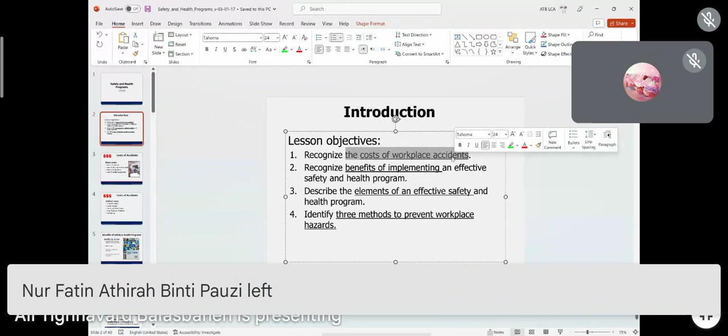First of all, what we want to study today is to recognize the costs of accidents—if an accident happens, it's against our will, but what kind of results does it have for us? We want to know the benefits of implementing safety rules, the elements of an effective safety and health program, and describe in more detail the methods to prevent accidents or hazards in the construction site.

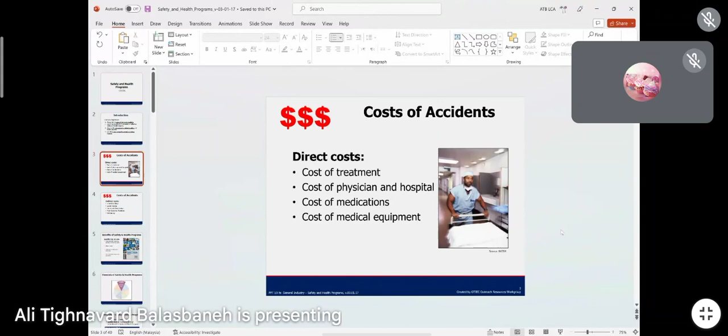First of all, we said we want to know what kind of cost the accident had for us. Let me expand this page. Okay, it's better. We got some costs, distributed into direct and indirect.

The direct cost, at least as you can see, is the cost of treatment of the worker who got the accident already: the cost of paying for the hospital, the cost of medicine. The medicine and hospital are two different costs, because the hospital cost is what the employer may pay only for the hospital, but after the hospital the worker still needs some medicine, some remedy with different costs—maybe physiotherapy, something like that. Cost of medical equipment in order of breaking a hand or leg or something like that. So these are all different direct costs that are put on the shoulder of you and your project.

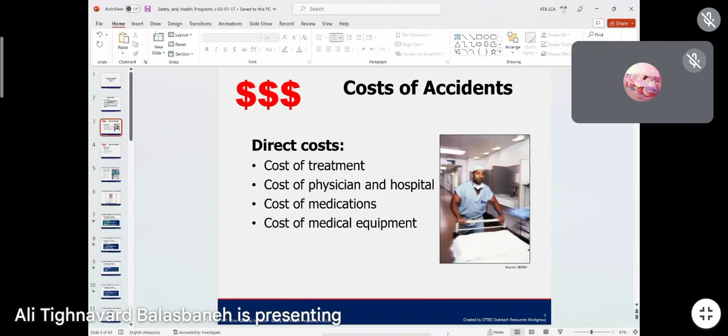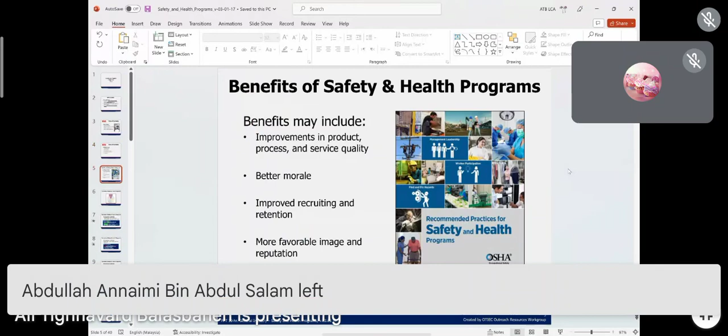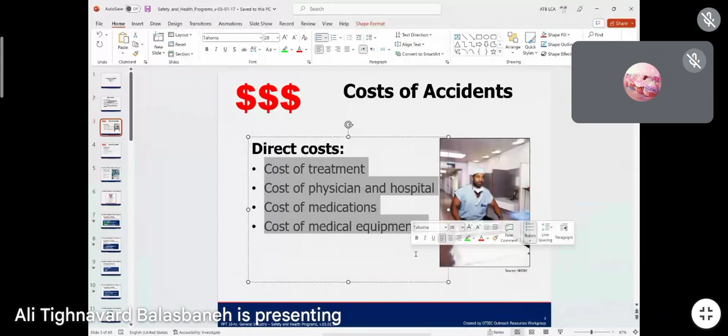And the benefits of a safety and health program—there are some benefits of course. Finding this benefit is very easy: as long as you don't face any of these problems, you already have the benefit. But let's review it. Some of the benefits: follow the OSH rules, improvement in the process and final product, better morale, improved recruiting and retention, and a more favorable reputation of yourself and your company in the construction area.

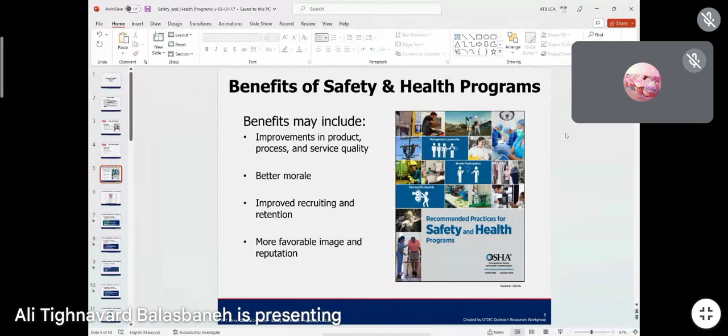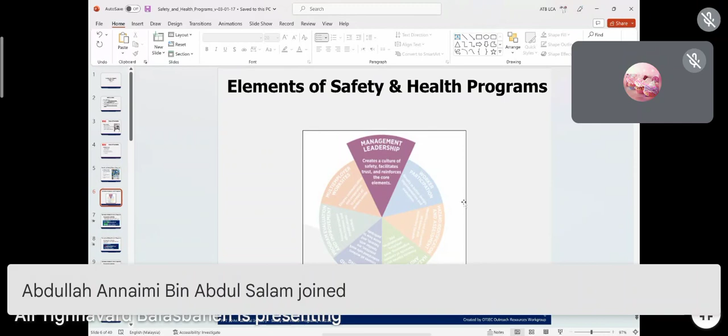So now we just reviewed what kind of consequences your project, your company might face, such as direct costs and indirect costs—it puts some costs on your company. So now, if we follow the OSH rule, what kind of element do we have to fulfill? What kind of principle do we need to follow? You might tell yourself, okay, I don't want any accident, but what should I do? What exactly, exclusively, do I have to follow to avoid any accident in my project?

Well, it's very easy, and at the same time not easy. It's easy because we know what we have to do—we're going to learn it. It's not easy because you have to do it in reality. Let's review: the first element or principle is management leadership. Who must be the leader? How can you be a leader? This is the hard part that you need to achieve through study and through experience. But let's see what is the detail. The first element of this safety and health program we just mentioned is management leadership.

But what action do you have to make as a leader? You need to communicate the safety and health program. Okay, how should I do that? Let's see—you need to establish a written safety and health policy statement and give it to the top management to sign it. Then everybody must follow it because it becomes a written rule by your company.

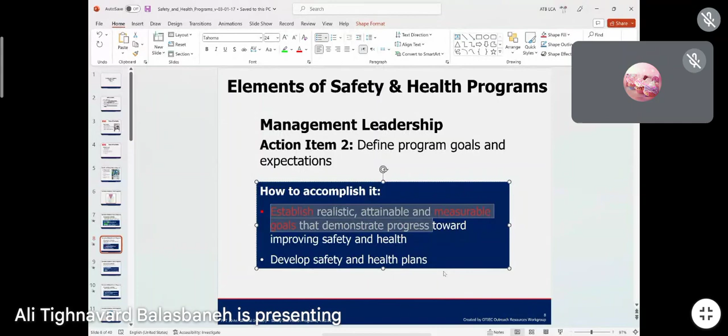The third action to become a leader: allocate the resources. Integrate safety health into planning and budgeting. This is very important because planning is something you already read about in the sustainability construction management subject. Budgeting is something else, and scheduling is also something else - we're not talking about scheduling here. We just want to integrate, merge the safety rule into planning and budgeting.

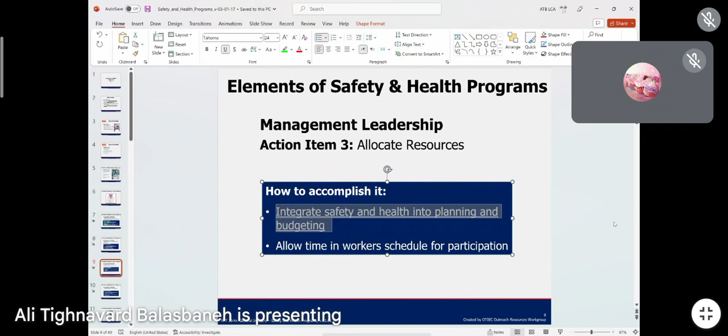For example, I want to give you a very small example to make it more understandable. How do we integrate safety rules with budgeting? When you calculate the project budget, you need to consider everything necessary for safety that workers need to use - for example, helmets, clothes for the workers, scaffolding, and the nets we install around the project to avoid something falling down. So that also needs to be considered.

The fourth action is expect performance: define the responsibility for accountability, and set an example for workers by following the same procedures.

So if you follow these 4 steps, it makes it a responsibility for your leadership stage - this is what you had to do to avoid an accident. There are 7 different stages. This is just the first stage.

Second stage is worker participation. Maybe it's strange for some of you - how do I have to invite workers to participate in safety? Maybe they are not well knowledgeable, maybe they're not educated - how can I expect them to share some of my responsibility with them? Is it even possible? Yes, not only possible, but it's one of the strategies to avoid accidents on site.

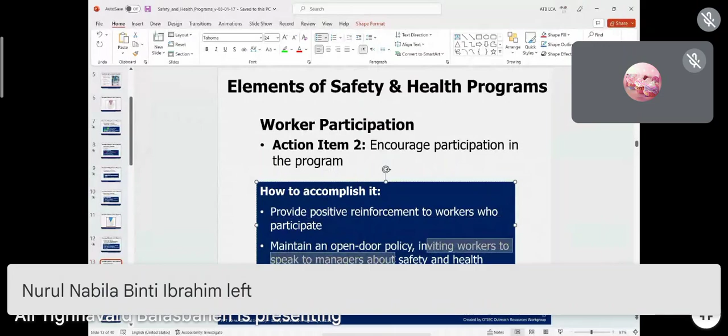Inviting workers to speak to the manager about safety. In some cases they have more experience - of course not in your job, but their own job - that we might miss or skip. We can use their experience. I'll go back to worker participation.

Action 3 for worker participation: involve workers in all aspects of the program. For example, what kind of program do we need to involve them in? Developing a program, reporting hazards, and developing solutions. This actually goes back to number 2, encourage them, but here we're expanding - developing solutions as well, analyzing the hazard, defining safe work, and some other items you can read. Let me know if you have a question.

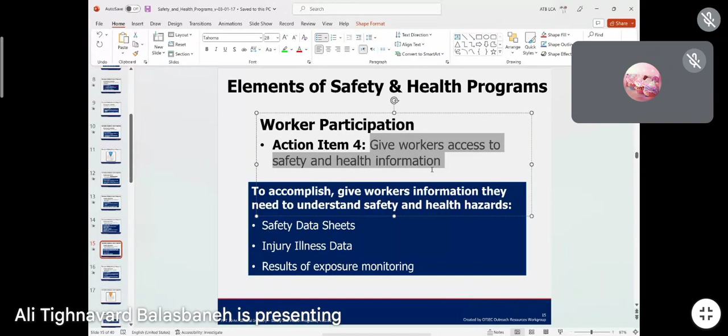And remove barriers to participation. This means when you invite them to access the safety information, you invite them to be involved in the program. At the same time, you must remove the communication barrier between you and the worker.

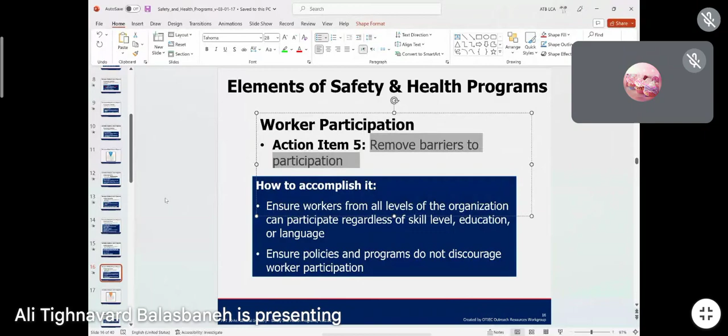Okay, now the third element of the safety program - we are reviewing how we can bring safety to the construction site, to our job. There are 7 elements. Now we are going to learn about the third one, which is hazard identification and assessment.

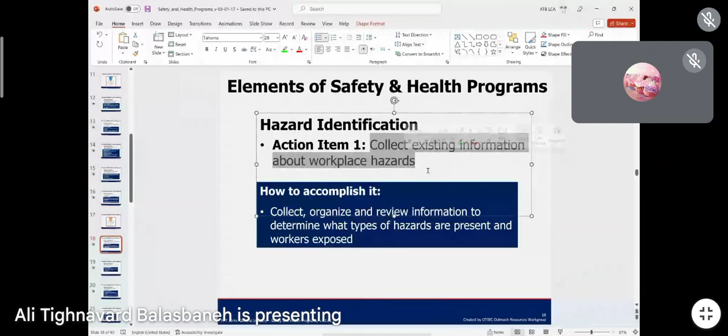There are actions that need to be taken here. For example, collect existing information about any danger, any near miss that's available on the site. Action 2, inspect the workplace, and this inspection must be regular - every day. Every day, not every month or every other week or every other day. Okay? Every day. Routine inspection of equipment, material, and talk to workers.

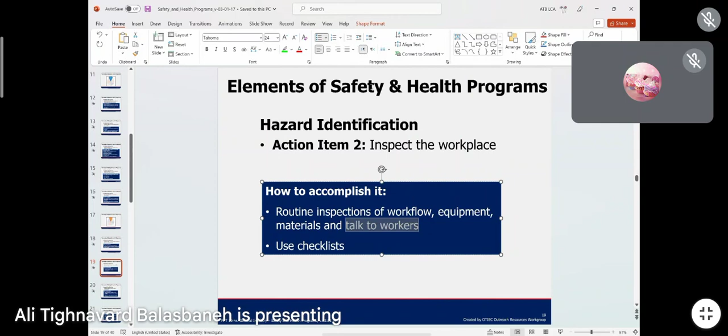Normally, when you start your job, if you choose to become a site manager or engineer on the site, you're going to have a place with some facility on the site. We studied about it last week - you remember the location, the site layout? Okay, you have an office there. When you have an office, it does not mean you sit there in your office from 8 in the morning until 6 p.m. This is not acceptable. You always need to go visit the work progress and talk to the workers - one of the things you need to talk to them about is the safety and health issue.

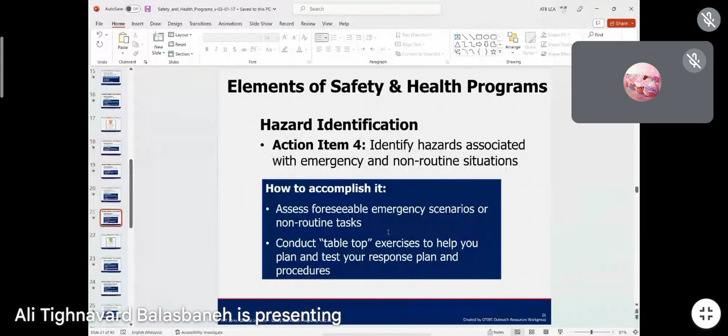Conduct incident investigation. Identify hazards associated with emergency and non-routine situations. So this we call conduct tabletop exercise that helps you plan and test your response plan and procedures. So this was the stage for element three. Now element four.

What do we have here? Hazard prevention and control. Here we want to know how we can prevent the hazard and control the situation. We want to actually prevent injury or accident happening to the workers.

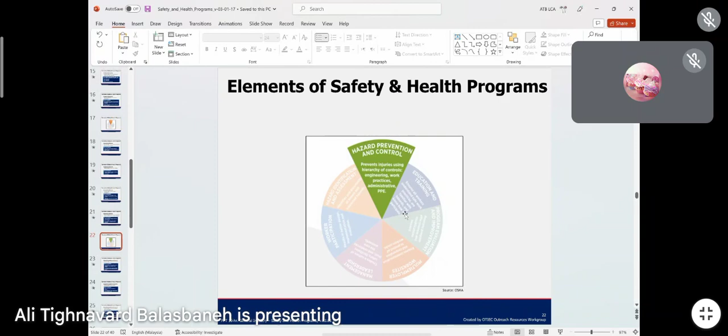Same as the previous one, we have some actions here. Let's see, what is the first action toward hazard prevention? Identify control options. Control options, what is that? What do we have to identify? Let's see how to accomplish it - review literature, OSHA standards. You remember NIOSH?

We studied about it on the second week. There were 3 different departments in Malaysia who are responsible and working on safety, and one of them works on publishing new research. Yes, that's it - new publication. And also the other 2 departments' work is hidden inside this, etc., for potential control measures.

And then another step to identify control options: get inputs from workers, safety consultants, or investigate other workplaces with similar hazards.

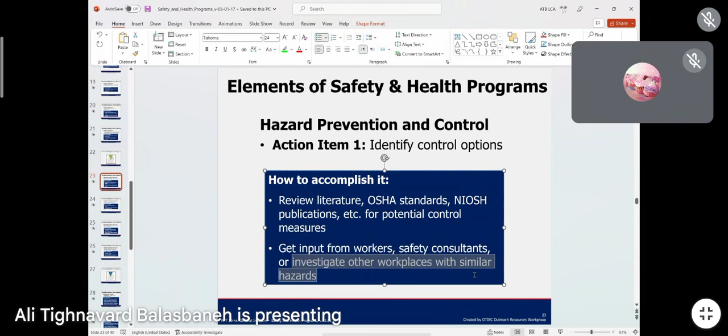I can still add or use, for example, the next item - use your experience from previous workplaces, especially if your previous work had some similarity with the current job, on how you can identify the control options and prevent the incident.

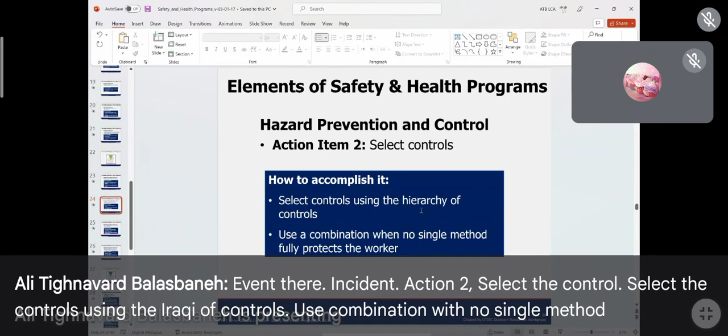Action 2, select the controls. Select the controls using the hierarchy of controls. Use a combination when no single method fully protects the workers.

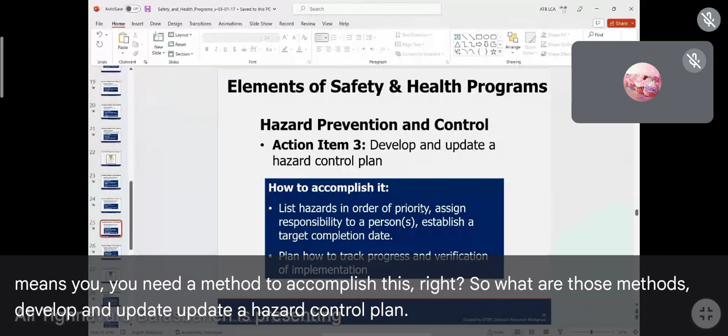Action 3, develop and update a hazard control plan, which means you need a method to accomplish this, right? So what are those methods? Develop and update a hazard control plan needs to be accomplished through listing hazards in order of priority.

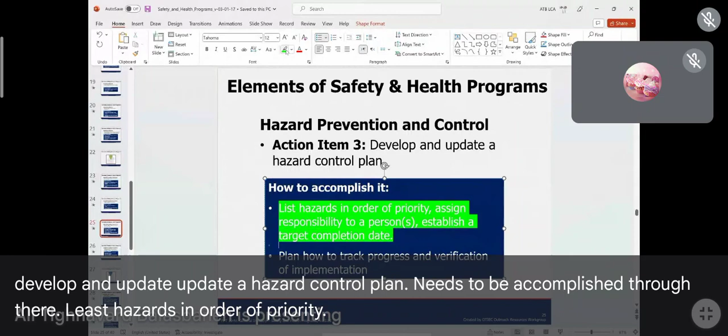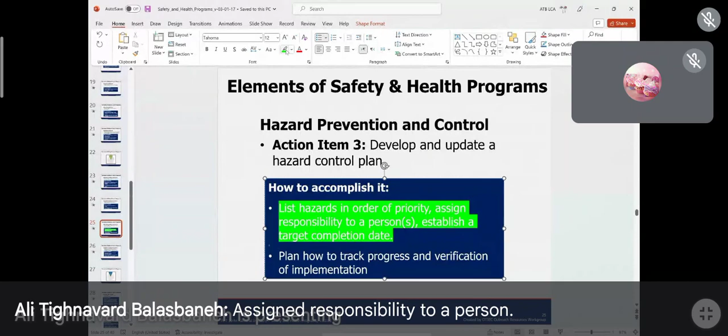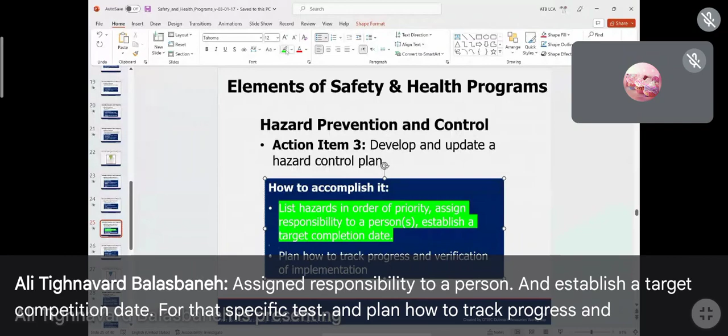Assign responsibility to a person, and establish a target completion date for that specific task, and plan how to track progress and verification of implementation on the site.

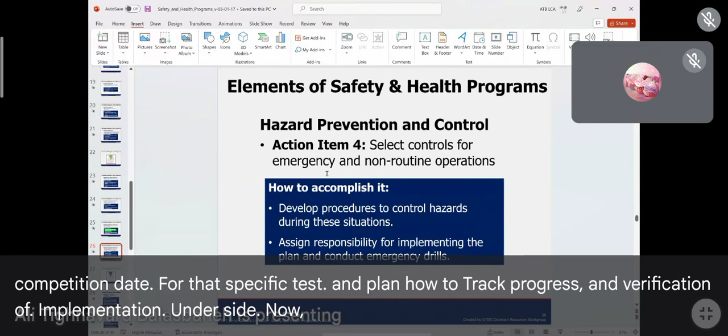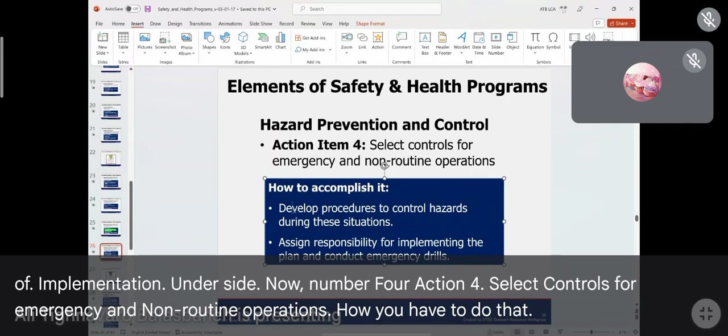Now number 4, action 4: select controls for emergency and non-routine operations. How do you have to do that? Develop procedures to control hazards during this situation. Assign responsibility for implementing the plan and conduct emergency drills.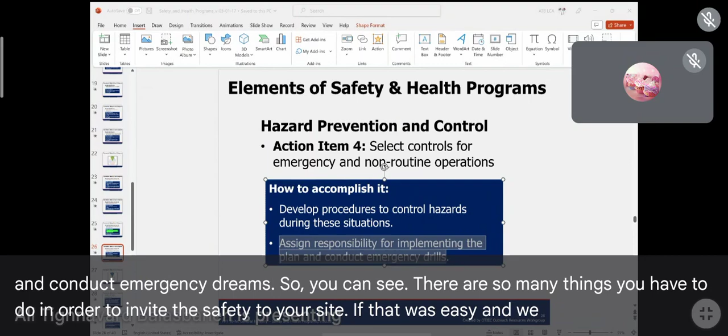So you can see there are so many things you have to do in order to invite safety to your site. If that was easy and we could do it in just one procedure, then I believe we would never see any accident on the construction site or any industry. But you can see this is complicated and requires heavy work.

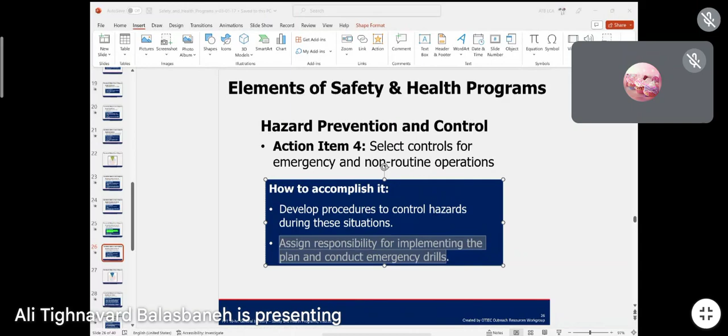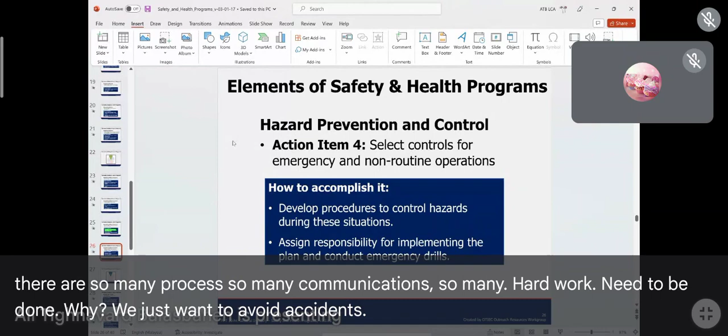I want to show you something. Give me a second. Okay, take a look here, let's see what we have. You see, there are so many processes, so much communication, so much hard work that needs to be done. Why? We just want to avoid accidents, to not face that direct and indirect cost.

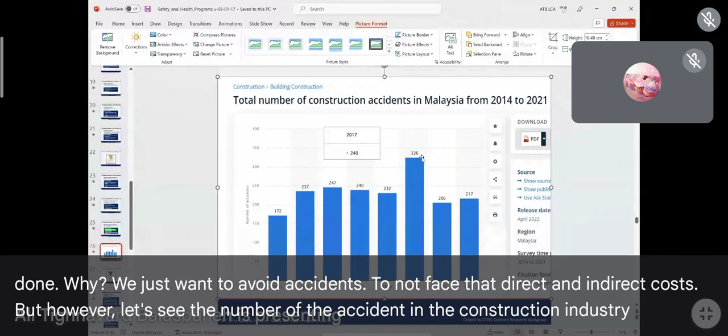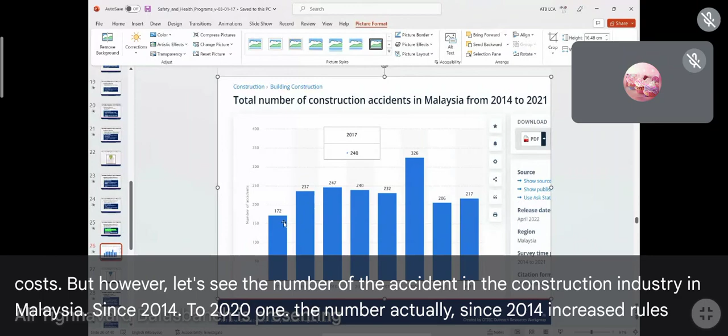Let's see the number of accidents in the construction industry in Malaysia since 2014 to 2021. The number since 2014 increased, rose from 172 to 247 in just 2 years. That's like, I don't know how many percent, 30% maybe, increase in one year.

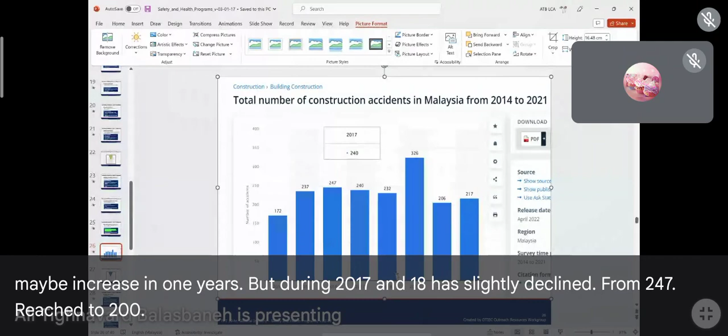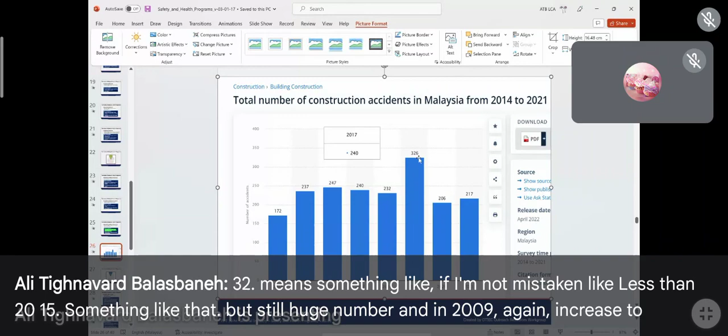But during 2017 and 18 it slightly declined from 247 to 232. That's something like, if I'm not mistaken, less than 20, 15, something like that. But still it's a huge number. And in 2019 it again increased to 326, which is the highest in the last 6 years.

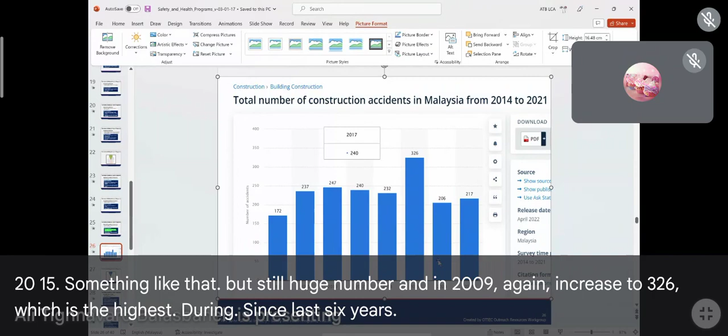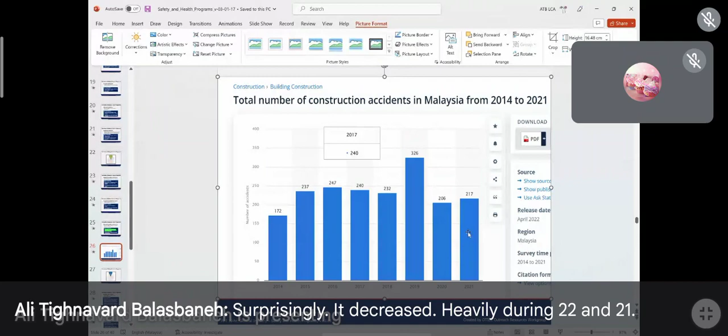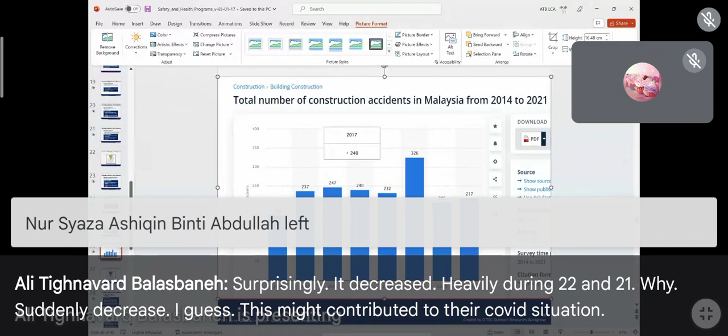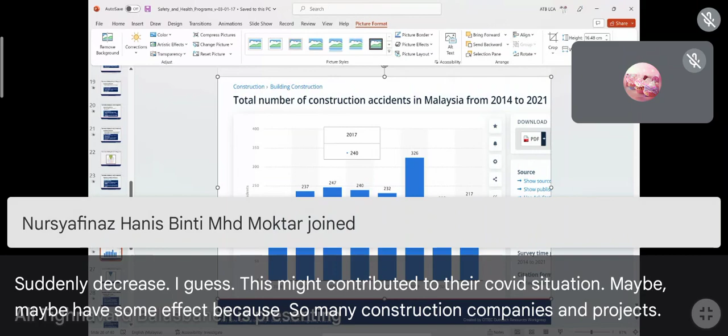And surprisingly, it decreased heavily during 2020 and 21. Why the sudden decrease? I guess this might be contributed to the COVID situation. Maybe it had some effect because so many construction companies and projects stopped operation during COVID. However, despite so many projects stopping, we still witnessed a high number of accidents within these 2 years.

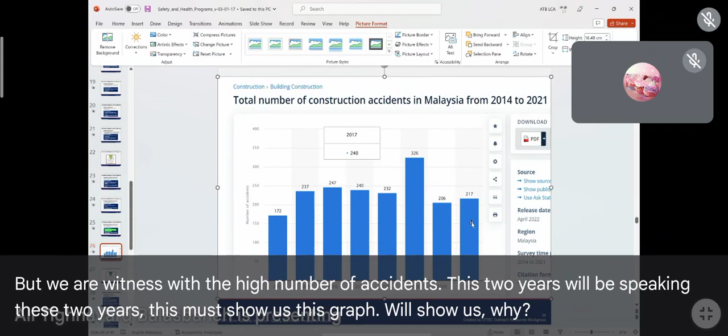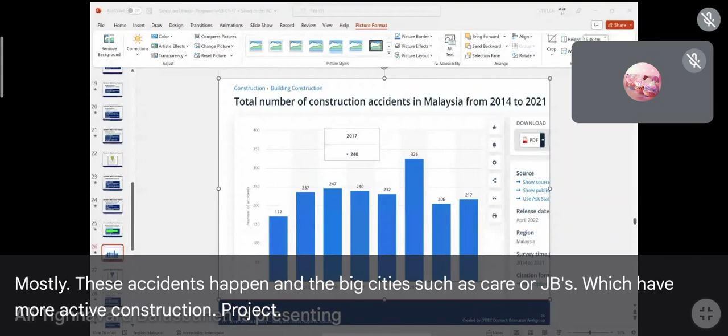This graph will show us why this subject is very important, why learning about controlling safety on site is very important. Mostly these accidents happen in big cities such as KL or JB, which have more active construction projects. You can Google and learn more about this issue.

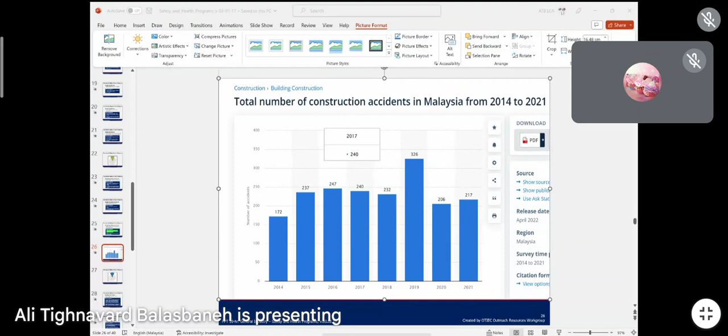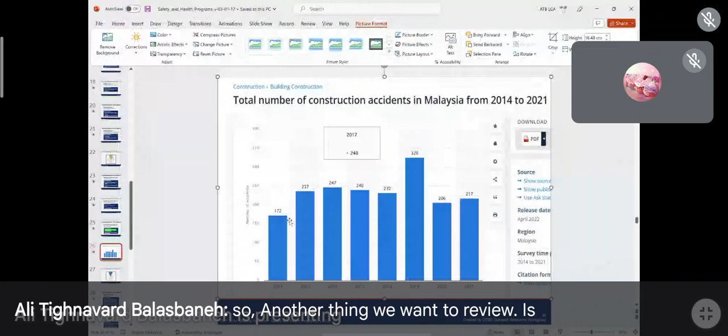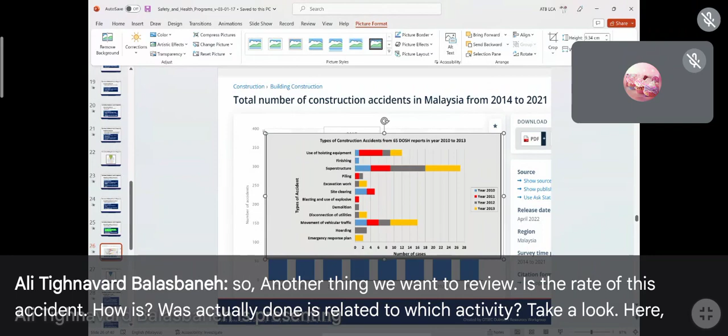So, another thing we want to review is the rate of these accidents, how it was actually related to which activity. Take a look here, here's another figure we have. The years are different from the previous one because here they just evaluated from 2010 to 2013. Most accidents that happened within these 4 years were in the superstructure stage, constructing the superstructure. You remember last week we discussed what is substructure and superstructure.

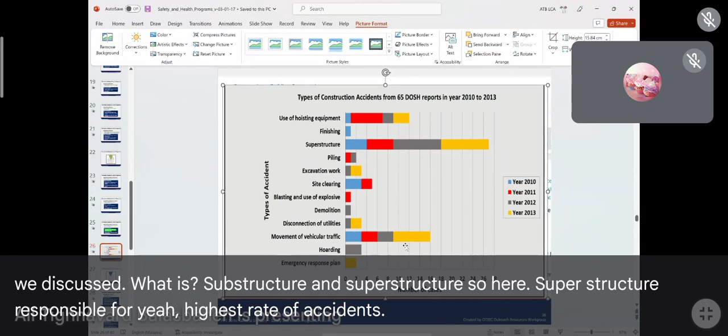So here, superstructure is responsible for the highest rate of accidents. Then we can go to the movement of vehicular traffic. Then hoisting equipment, which is mostly related to workers falling from high places. So you can see it's very interesting to learn this information because then you know why you have to learn about this topic, why this is very important.

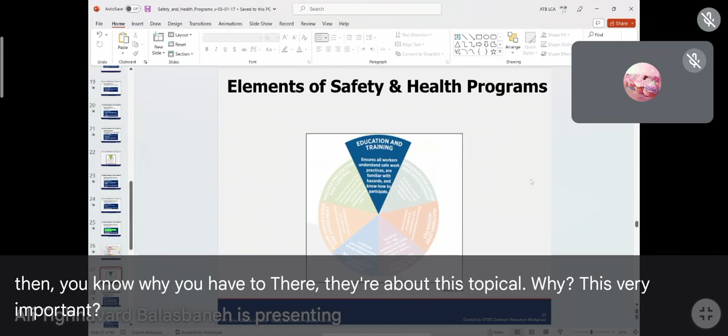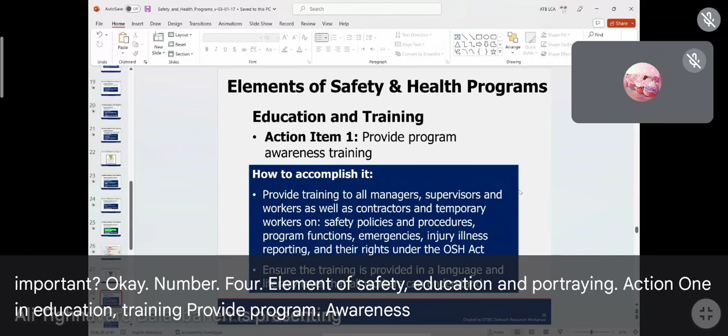Okay, number 4, element of safety: education and training. Action 1 in education training: provide program, awareness training, and how we have to do that. It's very clear because we need to provide training for everybody, every single person on the site.

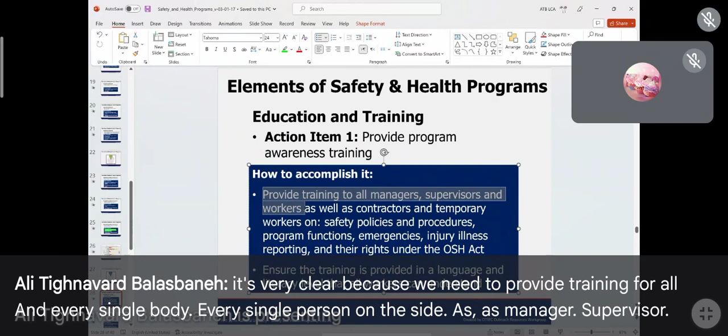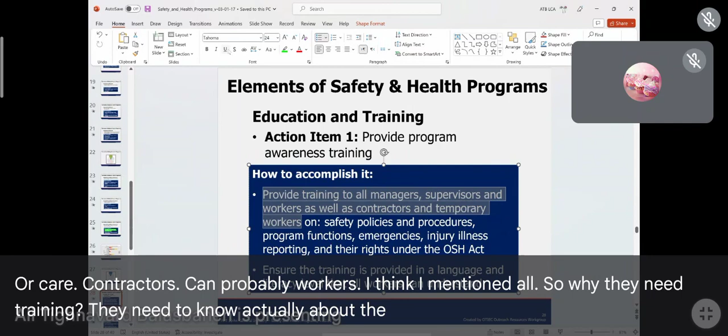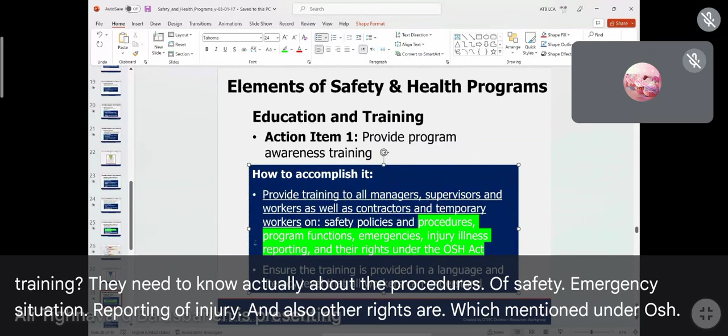As manager, supervisor, worker, contractors, temporary workers - I think I mentioned all. So why do they need training? They need to know actually about the procedures of safety, emergency situations, reporting of injury, and also other rights mentioned in the OSH Act. Ensure the training is provided in a language and literacy level that all workers can understand.

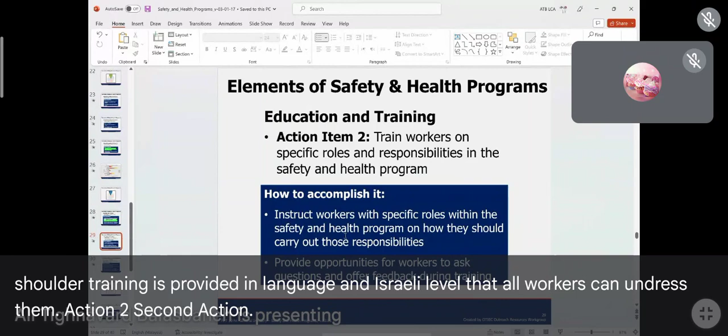Action 2, second action: train workers on specific responsibility and roles related to safety, which helps them to focus on their task.

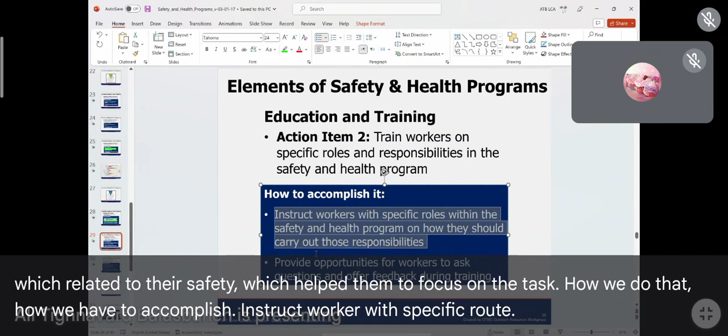How do we accomplish that? Instruct workers on specific roles within the safety health program and provide opportunity for workers to ask their questions, and offer them feedback during the training.

This is a privilege not only for you, because you can use their information and knowledge. Someone who worked 20 years, 15 years in the same task has very good experience, compared to you who just started or have only a few years, because you never did that job—you will just observe as an engineer.

Second advantage: by expressing their feedback and questions, the other workers also get privilege and knowledge from their questions. Because after any question, there will be a discussion, so everybody can learn more.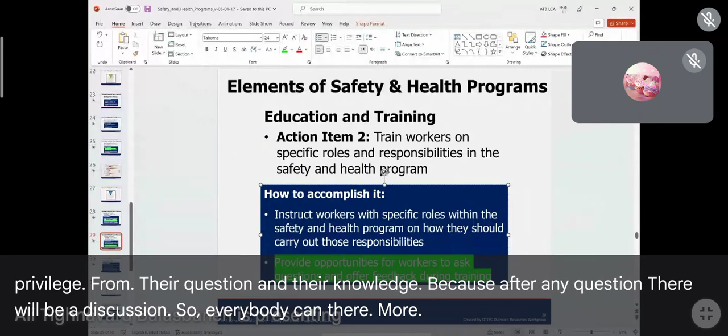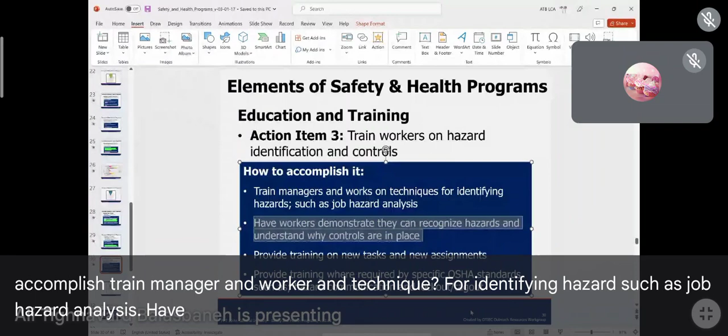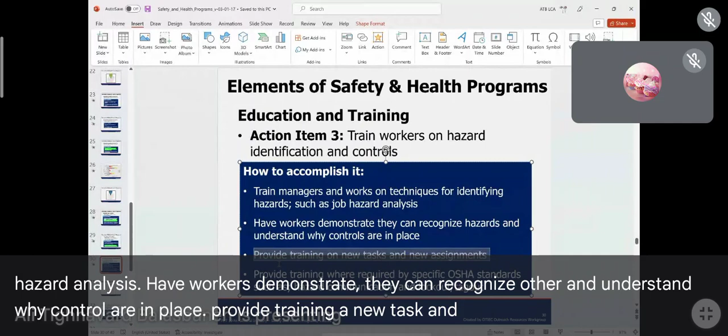Train workers on hazard identification and control. How to accomplish it? Train managers and workers on techniques for identifying hazards, such as job hazard analysis. Have workers demonstrate they can recognize hazards and understand why controls are in place. Provide training on new tasks, and there are other discussions related to education and training.

Okay, let's see what number this is—5 or 6, I'm losing count. It's okay. Program evaluation and improvement can help the safety health program, but how?

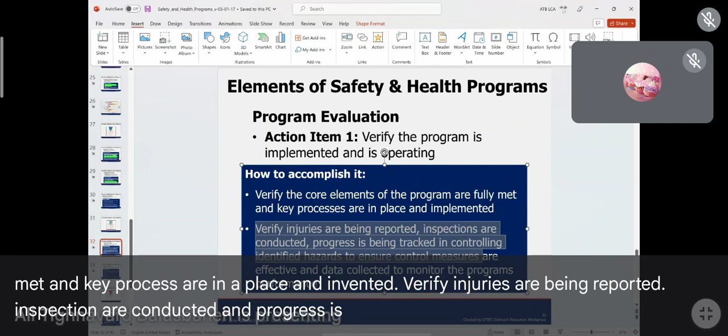Action 1: verify the program is implemented and operating. How do you do that? Verify the core elements of the program are fully met and key processes are in place and implemented. Verify injuries are being reported, inspections are conducted, and progress is being tracked in controlling identified hazards.

Correct the program's deficiencies and identify opportunities to improve. Why do we have to do that? Is there a problem? Yes, because as we always repeat, construction sites and construction work are very complicated places, complicated jobs, always vulnerable to some problem or deficiency.

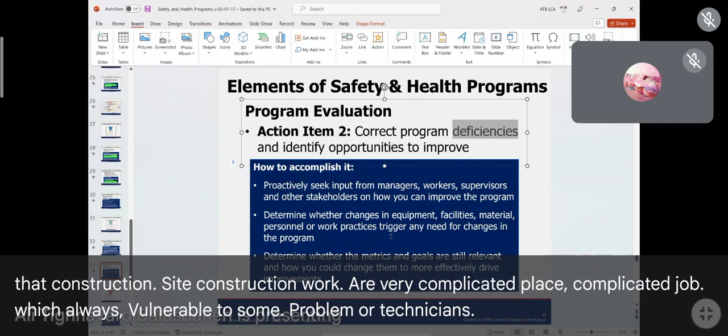What do we have to do? We have to overcome this deficiency by providing some plan B to improve the current situation. How do we do that? Seek input from managers, supervisors, workers, and stakeholders—whoever can share their knowledge with us. Determine whether the change is good or not, and whether the metrics are still relevant and how you can change them to be more efficient and appropriate.

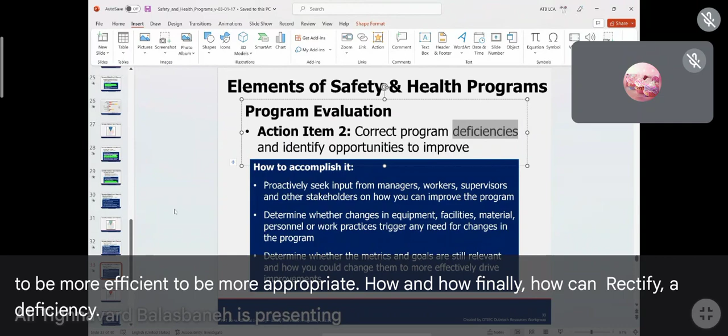Finally, how can we rectify the deficiency? Finally, the last element of safety health is the multi-employer work site. So what is that? How do we have to fulfill that?

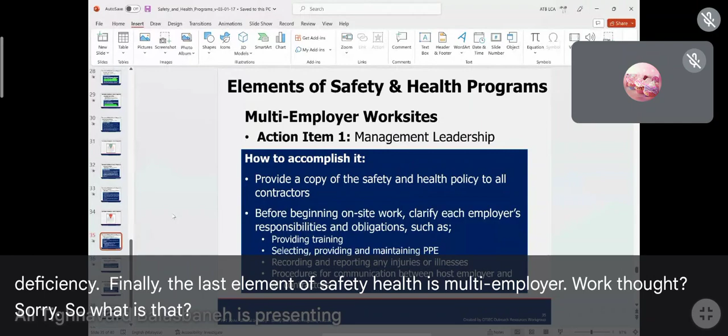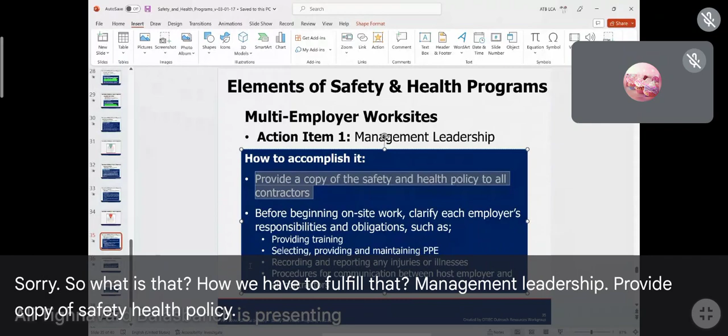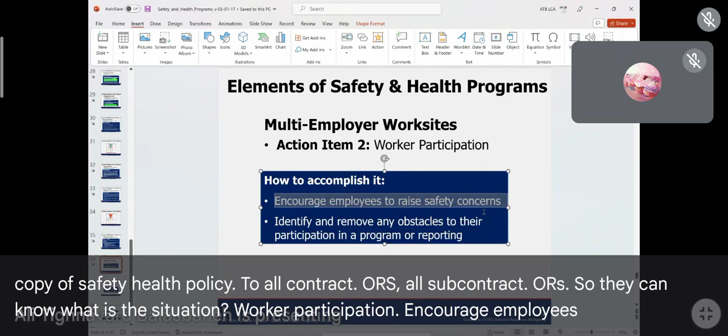Management leadership: provide a copy of the safety health policy to all contractors and subcontractors you have, so they know the situation. Worker participation: encourage employees to raise safety concerns—we discussed this somewhat in the second and third elements.

Host employer performs a worksite hazard assessment and shares the results. Hazard prevention and control: before starting the work, the host employer gives the contractor information about the program. Education and training—I think we already discussed this, let's skip it.

Now, what are the methods to prevent hazards? We already discussed this, but we want to know the benefits of preventing hazards. First, we protect the workers from hazards through effective control. What are the benefits of having effective control?

We help avoid injury. When you read this, remember direct costs and indirect costs—then you can understand it much more easily. Why do I have to read this? Why do I need this information?

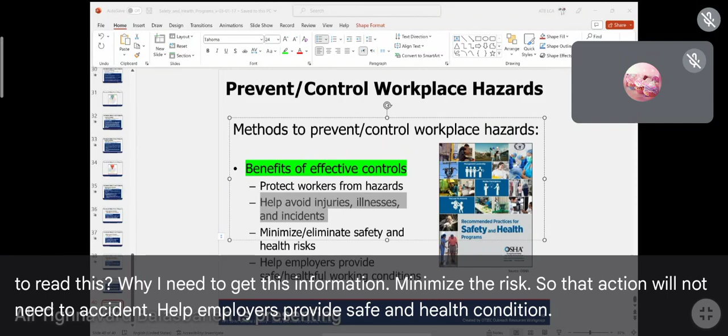Minimize the risk so that the action will not lead to accidents, and help employers provide safe and healthy conditions. That's all you have to do.

Any question, please share with the class. Please speak up, let's see. Any question? Okay, Muhammad.